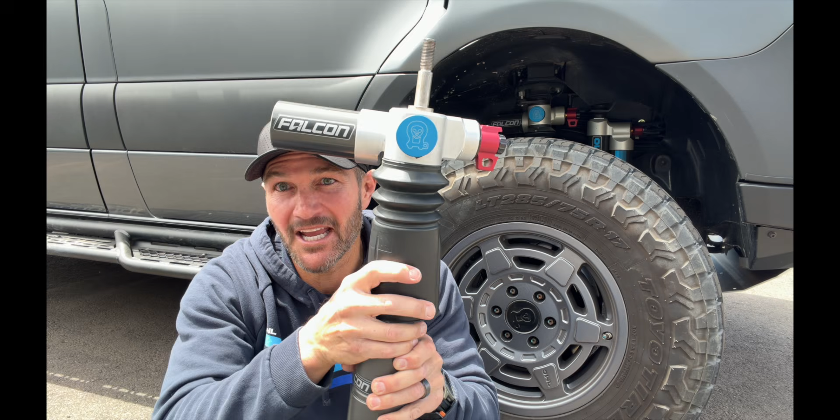This video is going to be about dampers - that's right, shocks, struts, whatever you want to call them. There's nuances to the different words, but we're all basically talking about the same thing. If you didn't see our first video, it was all about springs, specifically leaf springs and sprinters, and why it's critical to get your spring in the correct spring window. Once you do that, this is going to make a world of difference.

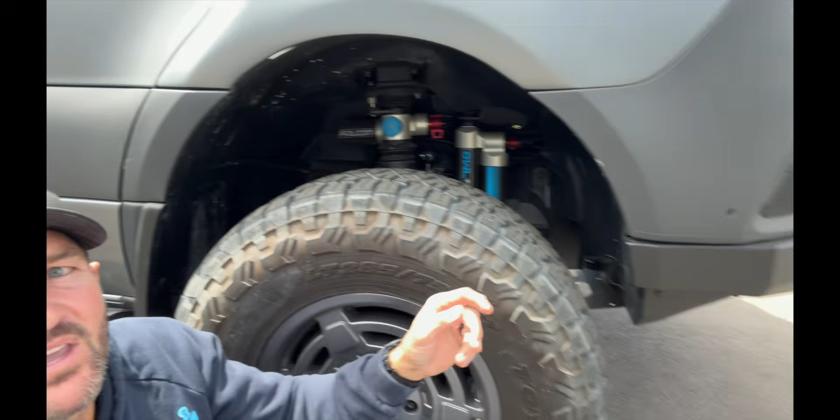Now, this is what is called our Pro Series strut. If you look behind me, before I explain what all this stuff does, you can see this is where your factory strut would go right here. And then this is what's called an auxiliary strut. These look very, very different from the factory strut, which I'm going to show you in a moment. I'm going to show you the difference in both compression and rebound.

Let's first talk about what's called sprung and unsprung weight. The wheel is unsprung weight, meaning if you hit an obstacle, the weight of that wheel has to be moved upwards by that obstacle. Whereas the vehicle itself is what's called sprung weight because it sits on top of the spring. If you don't have a shock absorber to absorb the shock, then that spring will oscillate and cause it to bounce like this. And when a tire or a wheel is not on the ground, it can't do you any good - it can't brake, it can't steer, it can't rock crawl.

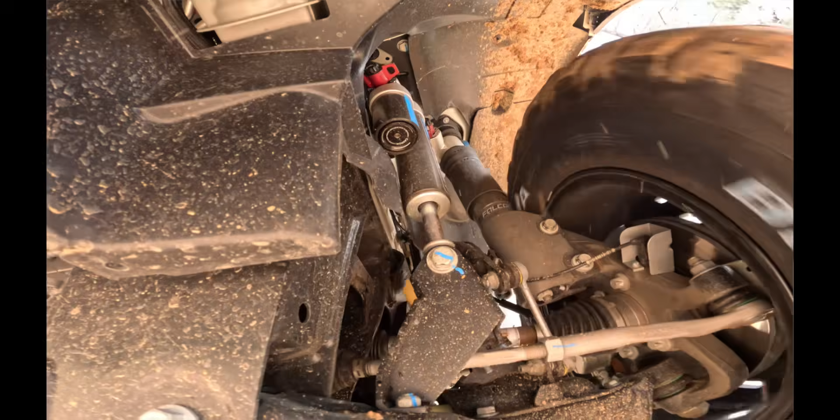And so the purpose of a shock is to actually stop the spring from springing. What is that? Makes no sense. Why would you want to stop the spring? Well, if you've ever seen one of those really old vehicles that's a complete steaming pile and the shocks are worn out, and you either push on the back and it would bounce, or it goes down the freeway with a wheel bouncing up and down, that's because the shocks are actually worn out.

Why does it make a huge difference on a sprinter? Well, we add a ton of weight, which is why we have to adjust the springs, but it's also important to adjust the shocks and the dampers. So basically, this is going to be not only more robust, carry more fluid, but it's going to be tunable.

Ours are adjustable because, as we talked about with certain other aspects of suspension, what you want off-road is oftentimes the polar opposite of what you want on-road. The same is true when it comes to these things. Let's talk about how a shock does what a shock does. So you have a compression.

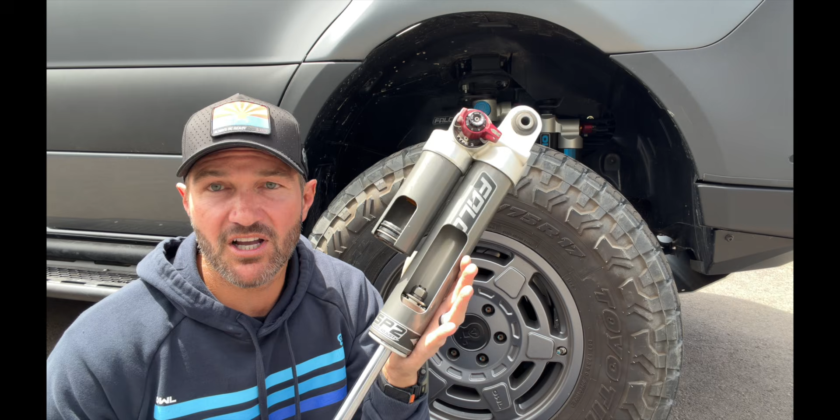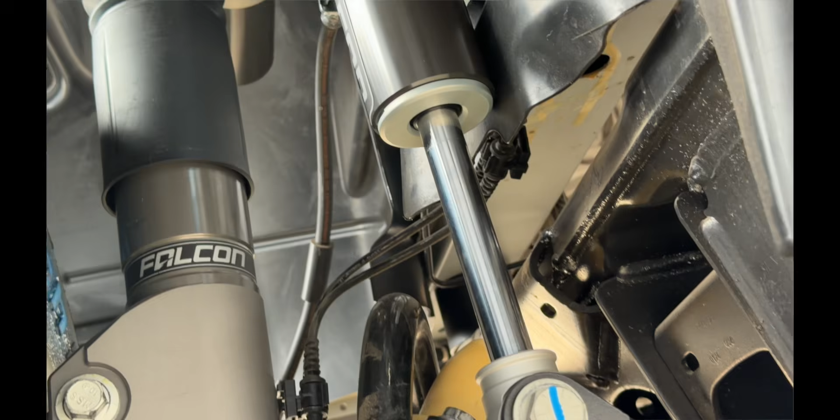Now I've got a cutaway shock here, which is nice because I can use this, and we can talk more about what this looks like internally as we get more into this video. But this is a cutaway of a piggyback reservoir auxiliary shock - so that is this one up here. This is connected to both the vehicle, the sprung weight, and the axle, the unsprung weight. In a sprinter, the rear is a solid axle, and in the front, it's not, but that's kind of irrelevant.

So as the spring allows this wheel to go up, that's called the compression. So if anyone's talked about shocks before, and you hear them talk about compression and rebound, well, this is your compression - shockingly, the shock is compressed. It's a lot of puns. And this is what's called rebound. So why they don't call it extension, I don't know, but it's called rebound.

And the reason these are important is when you hit a bump and that wheel is fired up towards the sprung weight, the vehicle, this is going to let that wheel travel up along with the spring, which is then storing the energy. A shock itself will not push the wheel and the tire back down. The spring stores the energy, and then it goes to push the wheel and tire back into contact with the pavement. The only problem is it's going to bounce it off the pavement like a bouncy ball. The purpose of the rebound is to put that wheel and tire back on the ground in a controlled way.

So theoretically, if your suspension is working properly, your spring will allow the bump to be absorbed with enough softness in the compression to allow that bump to be soaked up and not transferred into the vehicle. And then you're going to want to have the spring push that wheel and tire back down and have the rebound such that that wheel isn't fired into the ground, and it's also not too slow, because if it's too slow, this is compressed and then you hit another bump and then you have no suspension.

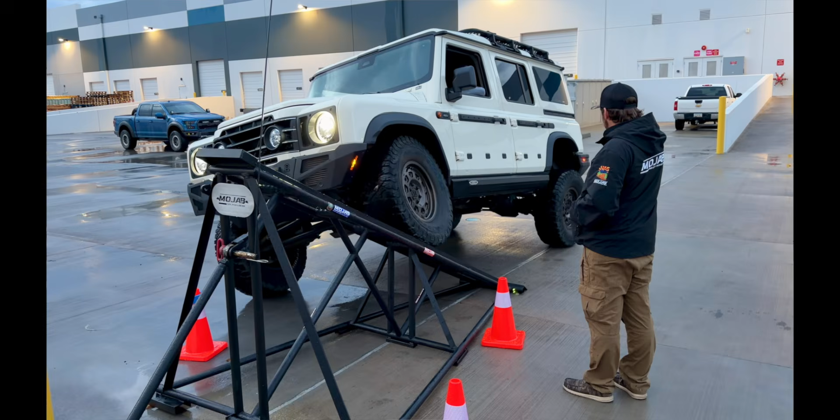So you're going to want to make your suspension soft, going from a firmer setting to a softer setting. That allows the compression to go up slower but more smoothly, and the same thing coming down. It's not going to fire that tire at the ground like it might on a freeway over a small bump.

When you're in the dirt, a harsh setup is very uncomfortable. So compliance is the word I use when you're in the dirt. You want shocks or suspension that articulate, moving up and down in a smooth, controlled motion to keep traction. Whereas on the street, you want shocks and dampers that give you good stability and feedback. That's the high level discussion of shocks and dampers.

So let's talk more about how they work. We're in the lab, I've got my cheap Amazon lab coat on, and my glasses so I look smarter. Let's talk about how shocks actually work.

One of the most important aspects to look at first is the basic layout. Let's take this auxiliary shock, like from a Sprinter 2500, and compare it to a factory damper. This one's actually off the rear, but it doesn't really matter, they're basically the same in front, just with a different bracket. The shape is what we're going to talk about here.

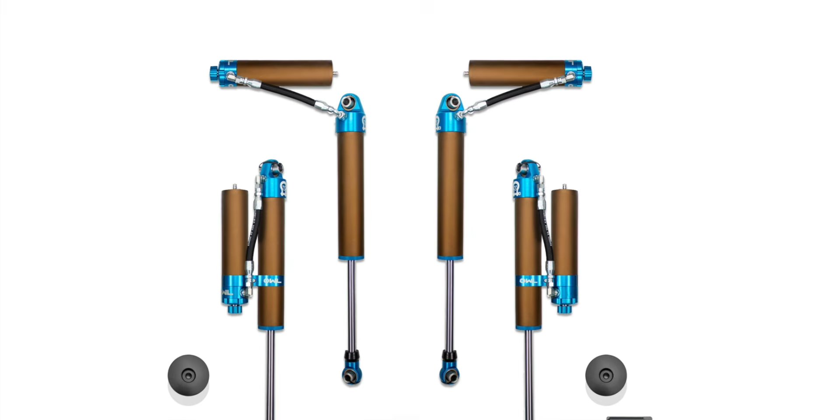This is a smooth body, and this is called a piggyback reservoir, because it's like a little piggyback. Isn't that cute? You also have remote reservoirs where this has a hose, like our trail flow kit for Grenadiers. But I want to explain why this is so much better than this.

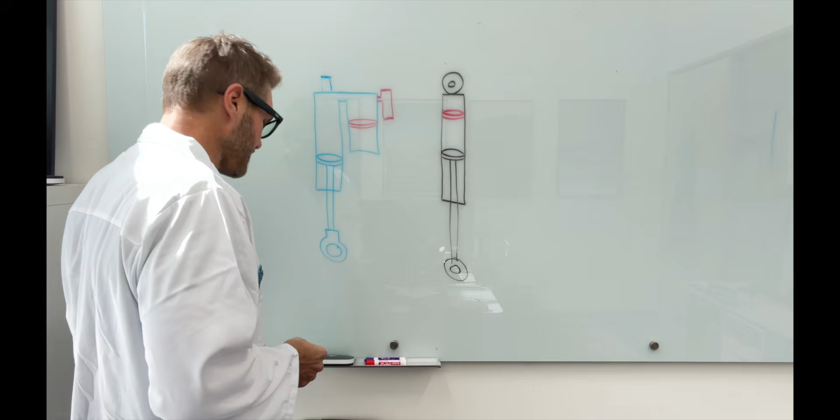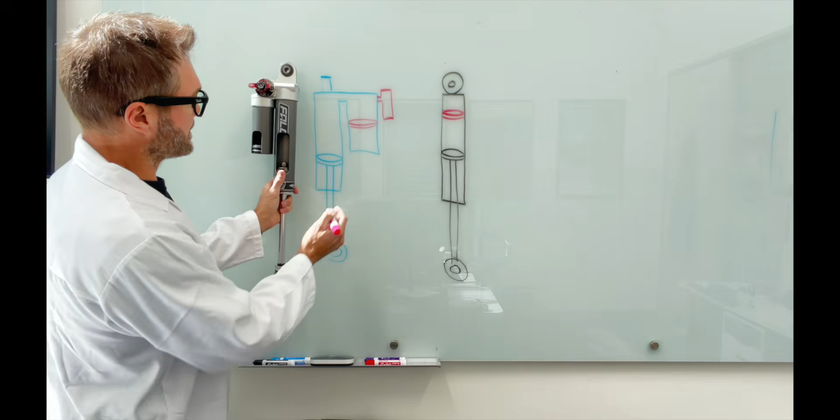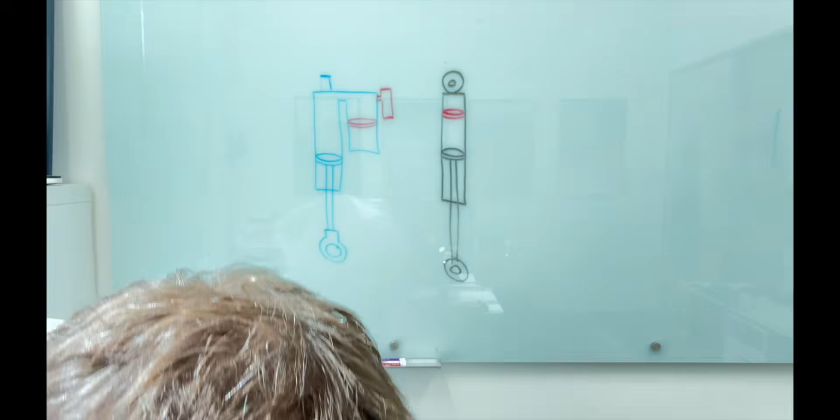Let's use pink, pink's a good color. So you've got this area here, and if I hold up a piggyback reservoir with the cutaway, it's actually opposite this, but this area corresponds to this area here. I'm going to shine a light so you can see it - see that orange piston in there? This area is called gas, that's your gas. On a smooth body shock, like found on the Mercedes Sprinter, that's going to be this area here, and that's your gas.

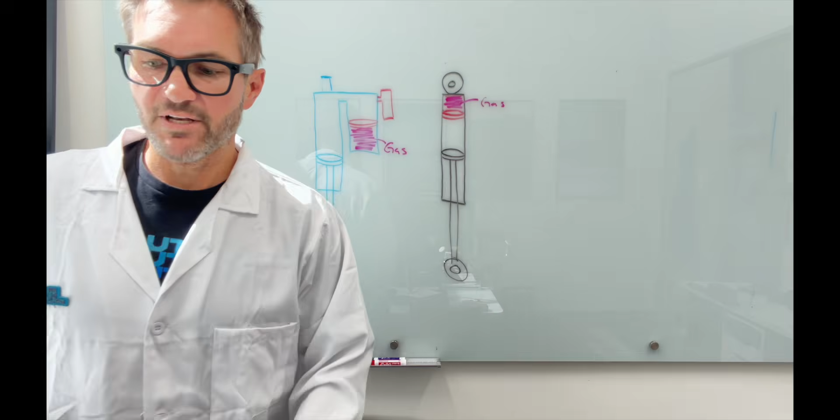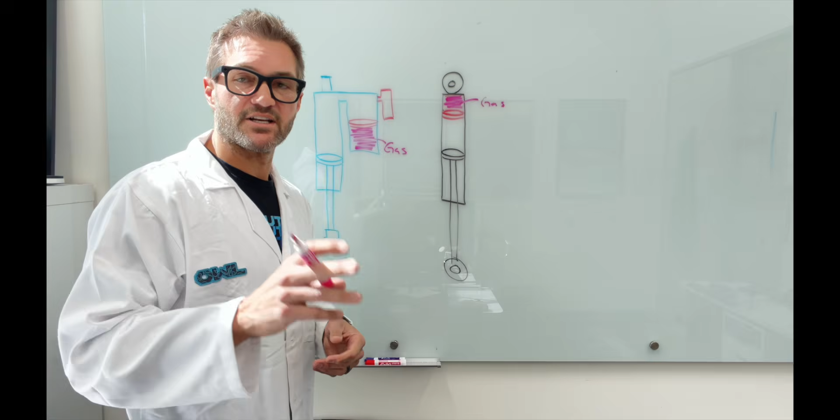There are a few different things you can fill this with gas-wise. Most good shock manufacturers use nitrogen, because air is hydrophilic and contains water, and water can corrode things. Additionally, if you have water in it, as you heat it, it can expand more because the water can turn into vapor. That's why they use nitrogen in race car tires and in airplanes as well, because it's inert - so the tires on an airplane, should you have a blowout, won't catch fire.

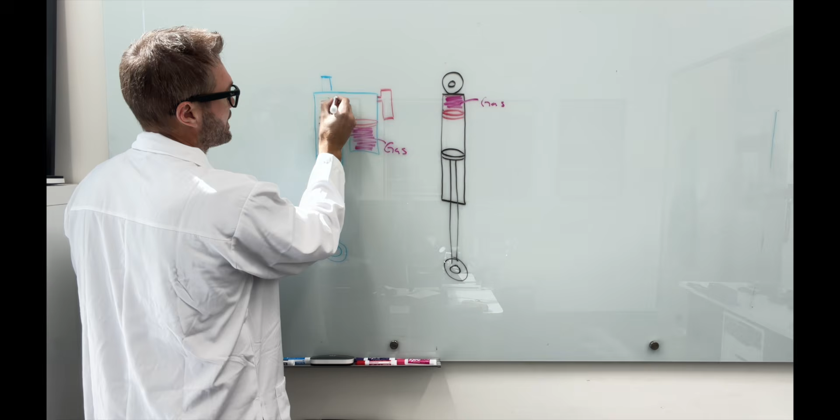Anyway, so you've got a gas portion. What that gas portion does is add that soft compliance, because the rest of this - I'm going to make the shock oil brown here - we'll color this whole area here. And we've got a tube over here, and then stuff here. Actually, I should have technically drawn some more valving here. So I didn't draw the oil over here.

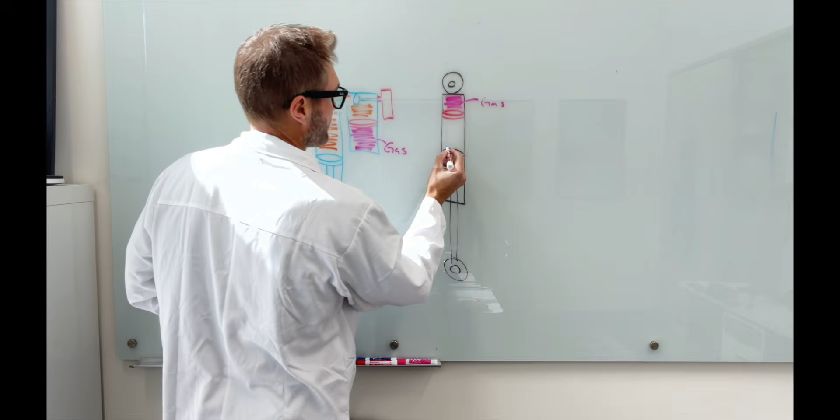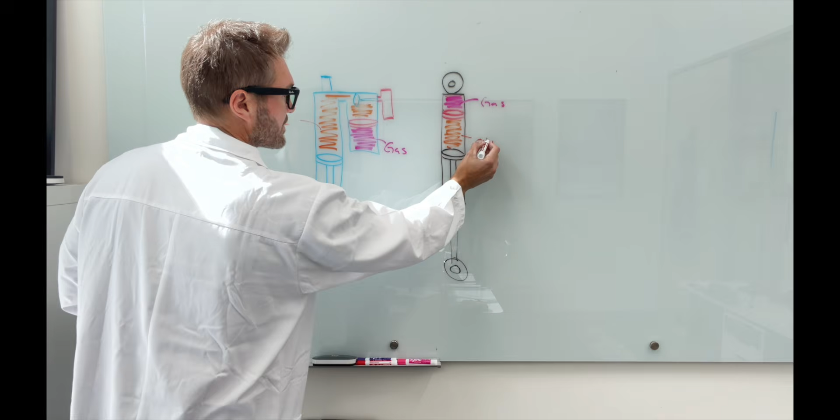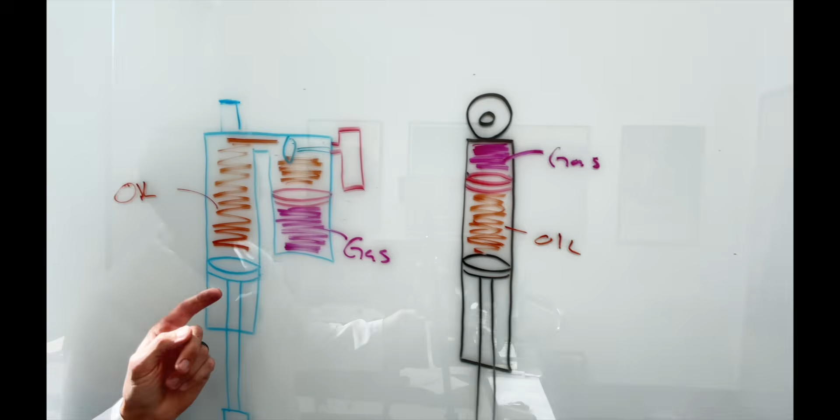So immediately what you can see is that the sheer volume of oil in a piggyback shock versus a smooth body is massive. As I bring you in closer, you can see that the amount of oil in this piggyback shock in this demo is basically double. Now what it is exactly in the real world, I don't know. However, you can clearly see that, and this is a front shock, so if I had a rear shock, this would obviously be longer. But the amount, this is just a shielding, so there's nothing in there but a piston. You're talking about this portion here. It's not only skinnier, but you only have a small section of this that can contain oil.

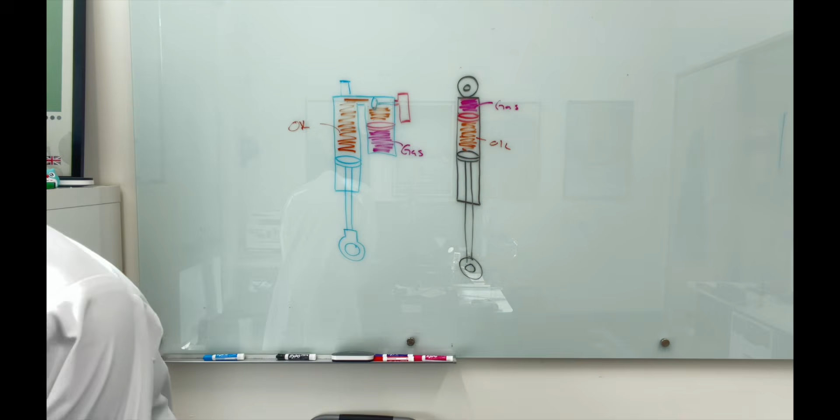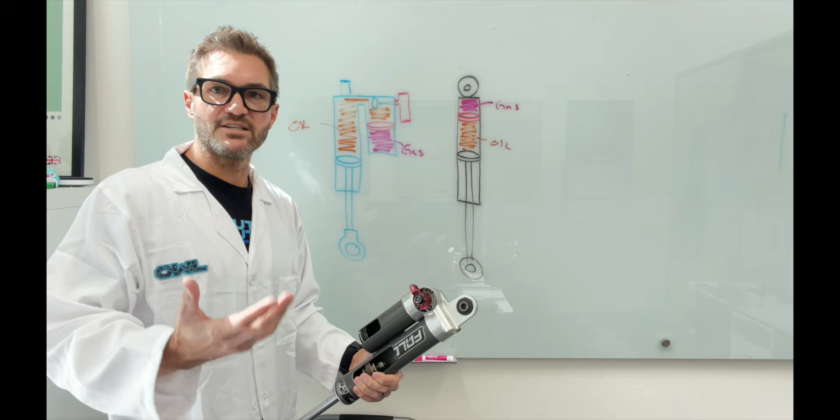Why is that important? Well, anytime you have kinetic energy going into the shock, which is that compression stroke we talked about, you're gonna have fluid traveling back and forth through the valving, which we'll talk about shortly. That's going to create heat. When you create heat, you actually get less viscous oil, which means it's thinner, and it will then move through the valving more easily, which actually changes the valving of the shock. And so if you have it valved properly, but your oil gets too hot, it's actually gonna be a much softer valving than you intended because it's gonna flow through the valves much more quickly.

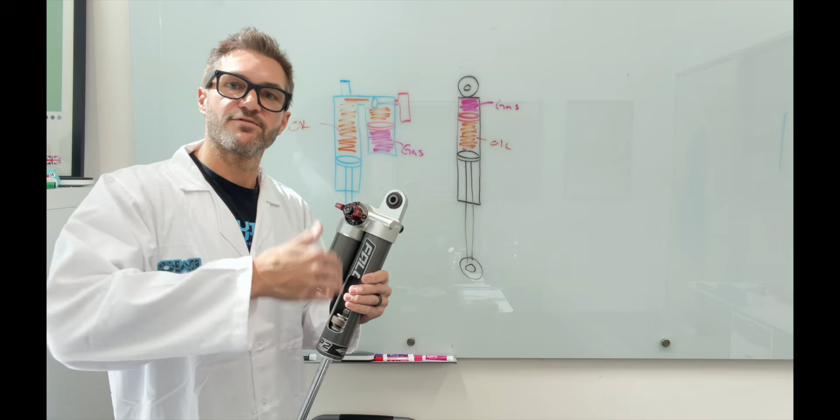So one of the advantages, just going from a smooth body to a piggyback, is purely the amount of shock oil that you have to dissipate heat. That's gonna mean that your damper is gonna work more effectively on those washboard roads where it might be going up and down really quickly, frequently, for a long period of time.

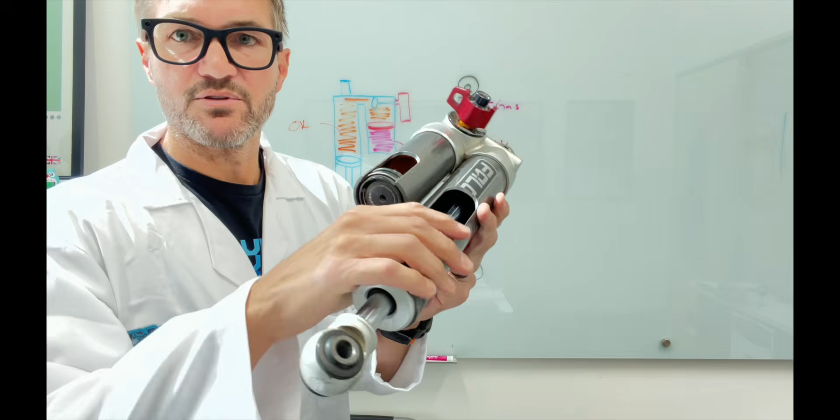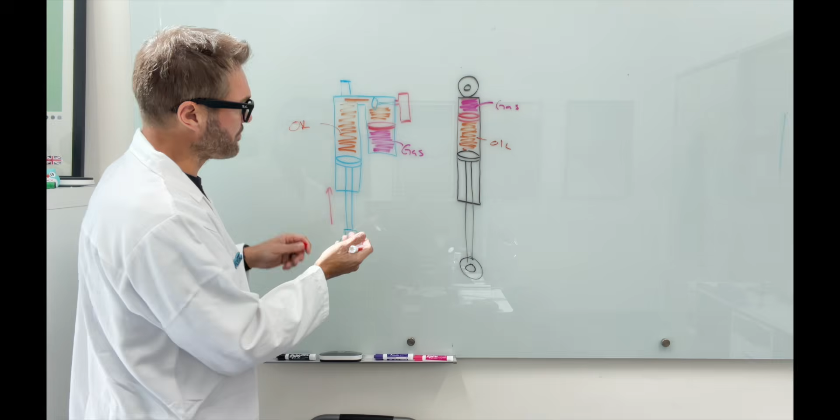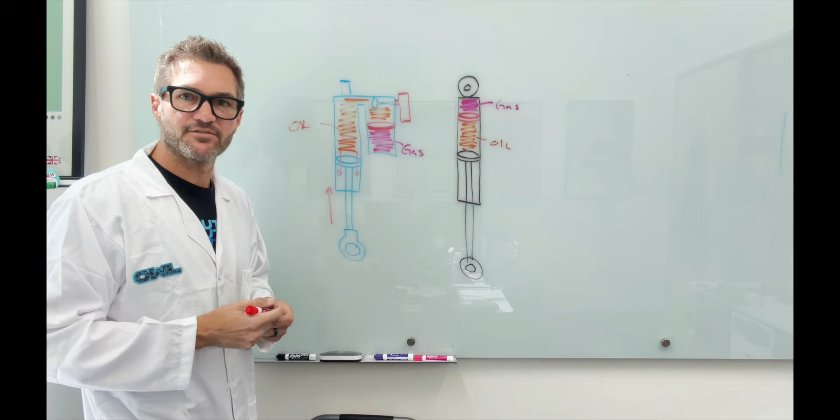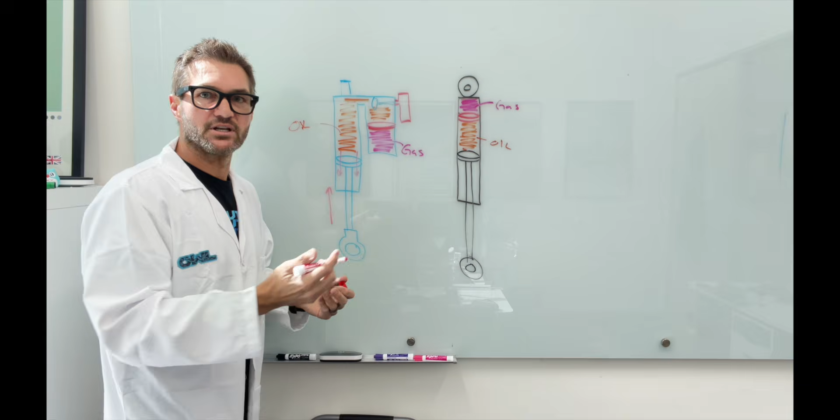Now let's talk about this gas area. What the gas area does - remember I showed you this thing in here that was orange? That moves up and down as this shock is compressed, right? So we're moving this up. That's going to allow a certain amount of oil past the valves, but liquids are not compressible. So oil, water, it's not compressible - it's one of the reasons hydraulics work. So as you move this fluid through the oil, if you try to move it really fast, the oil can't always travel through the valve fast enough if the shock is compressed very quickly. And so what happens is this gas, which is much more compressible, ends up being kind of like a compliance or a cushion.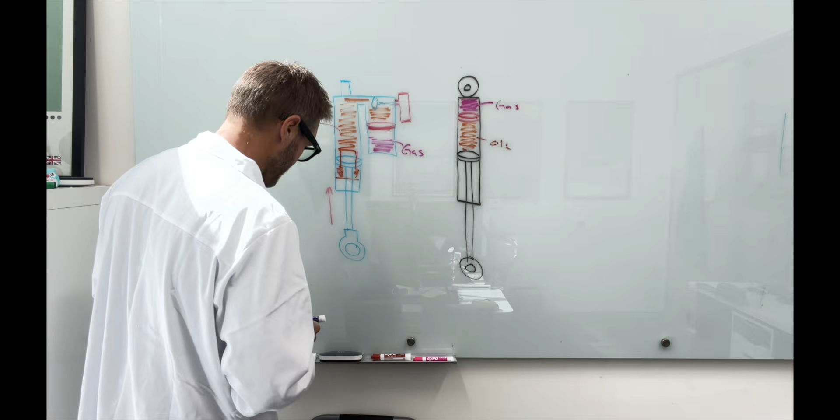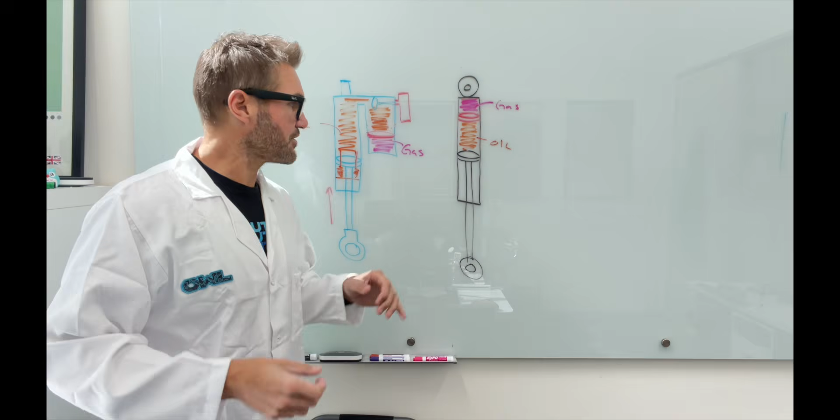So this, as this would go up, oil would go down - the oil would pass through the valves down here. And then what would happen here is this gas portion - if you want to be more technical with my Amazon lab coat on, gas thing - so this plunger might now be down here, and some of the fluid has now pushed more on that, and that is going to allow a bit of cushion because it's compressible. And so this gets dialed in the same way that your valving would get dialed in.

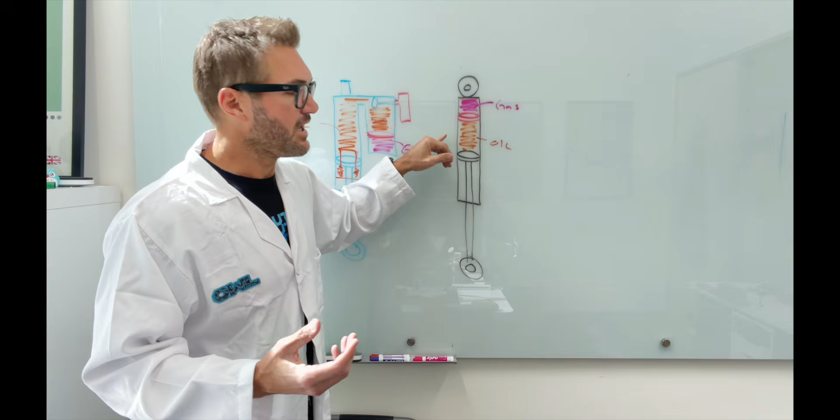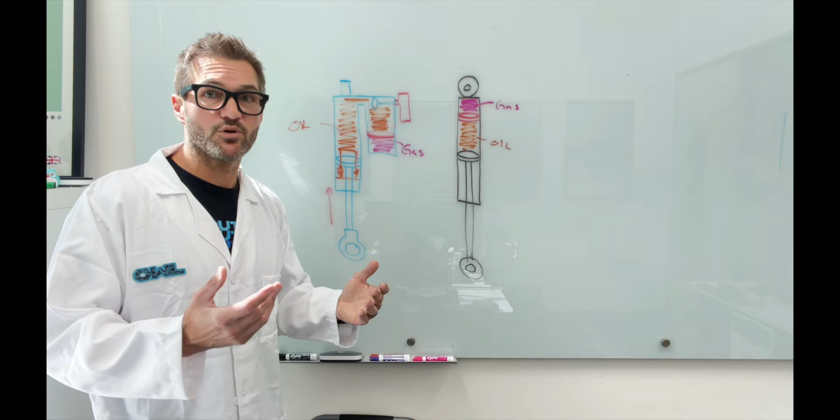And again, moving over here, you just lose room for everything. And when you have an empty cargo van, you only need so much dampening. But when you build them out into adventure vans, you have massively more load, especially on the rears. It's not firm enough, it's too soft. Just like the vans are undersprung, the dampening is underdamped. And so just changing the spring isn't gonna fix it, just changing the shock isn't gonna fix it - you really need to change them as a pair to get the back end working. But again, I go back to just the sheer volumes in a smooth body - you can't really accomplish great off-road performance or great on-road performance with all of your kind of limited capacities.

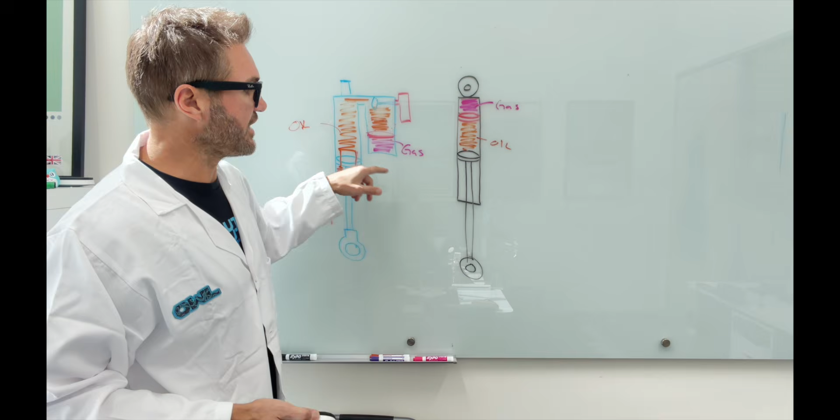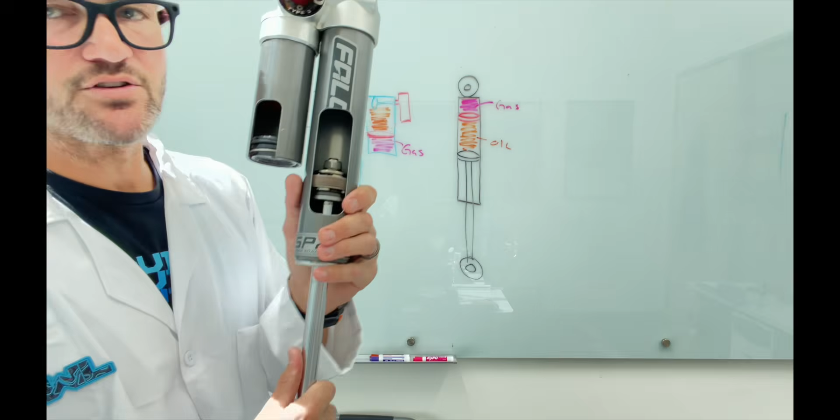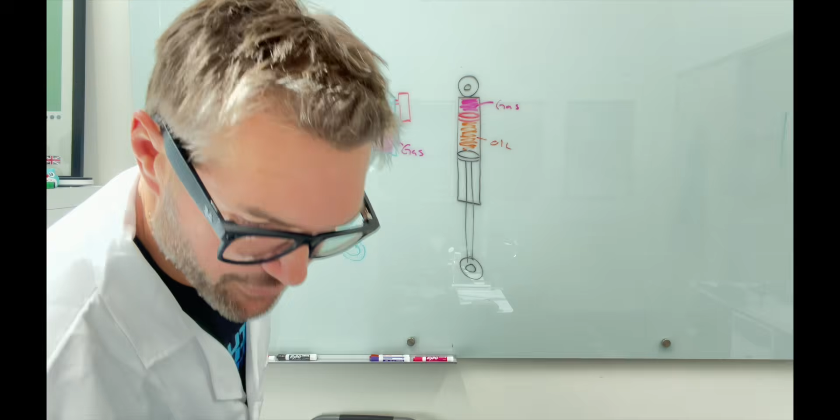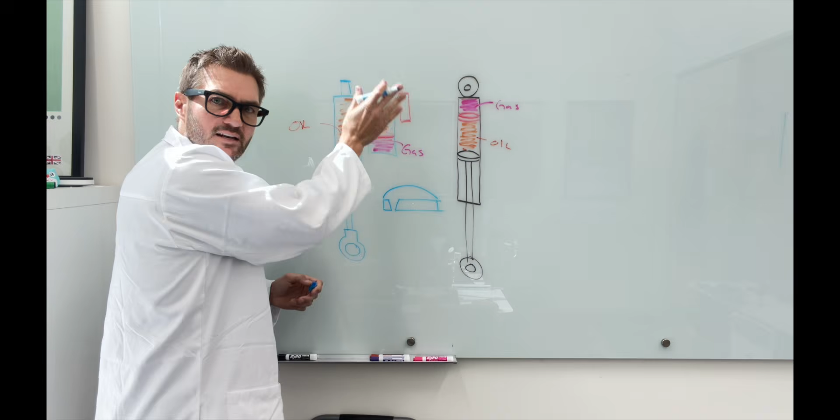And that would be for oil. We've cut it in half like pizza. And then this would be for compression, because the oil would be traveling this way. And then this would be rebound because the oil would be traveling that way. And so what they do is in that machined valve, they offset those holes.

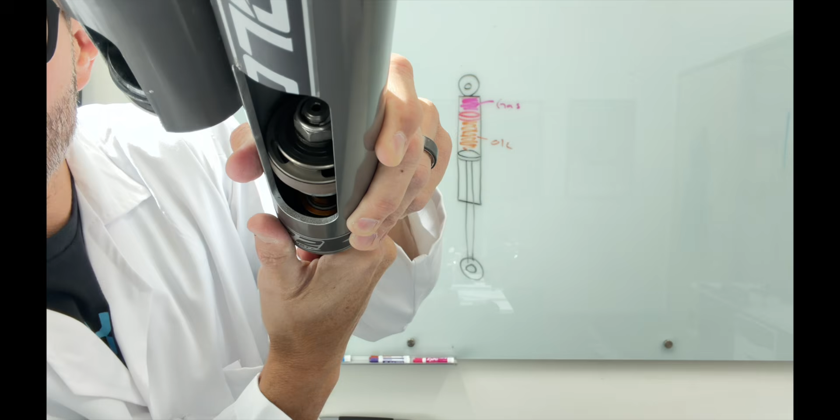So you can see two right there, and then you flip it and you see correspondingly a single on the bottom. And so that is how they feed the fluid through the valving. That's one way you can change how a shock performs.

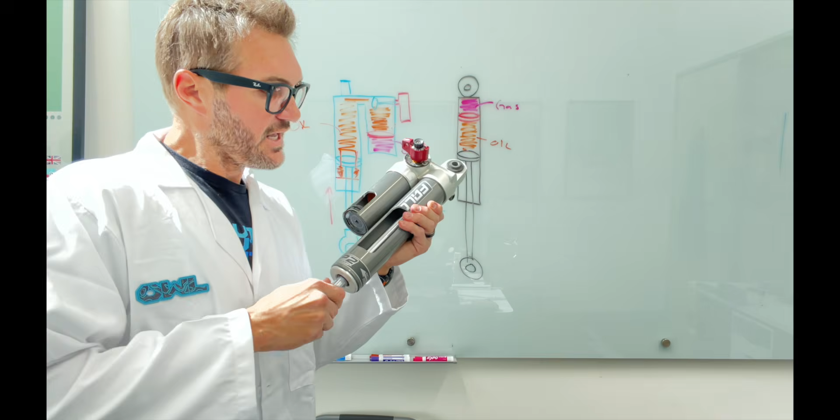You've also got these shims. Now they're really hard to see, but they're right below here. It's a little piece, see these little washer-like things? Okay, so that's your shim stack. And your shim stack is kind of going to be something that is progressive.

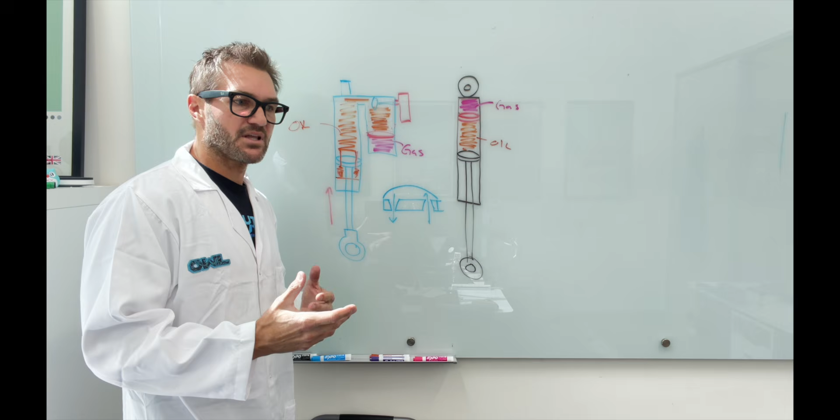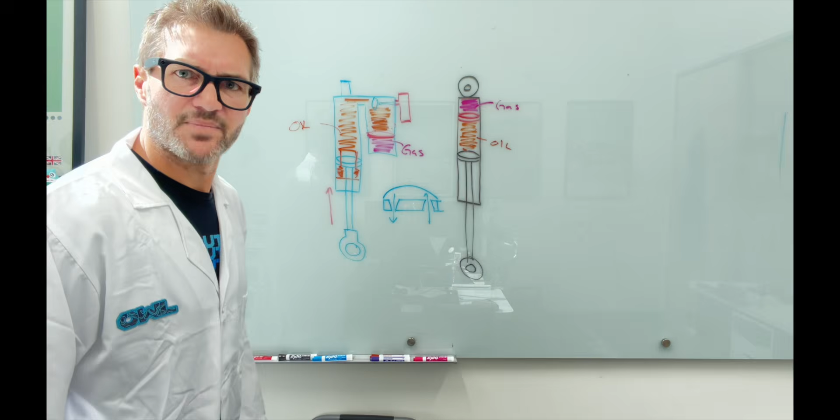What I mean is, as this goes up faster, we talked about how it compresses the gas. But what also happens - let me move over here, I might need that later. So now if we look at the shim stack, you've got a valve, way blown up, and below it you've got holes in this.

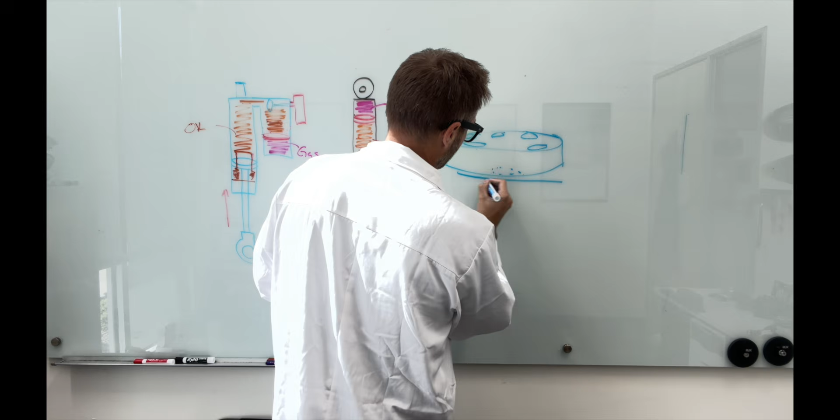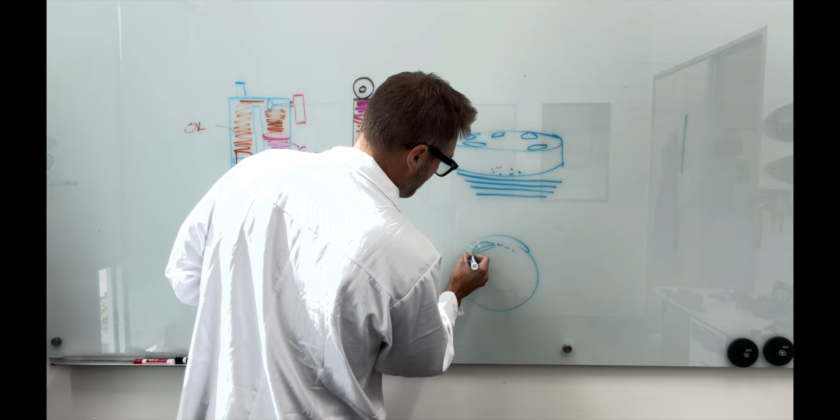Okay, so you got holes on both sides of that. Then below it, you have these stacks of shims. And oftentimes they will be like an upside down pyramid. These are blocking part of the flow through those holes. So if you looked top down at a valve, you might see a hole like that, and then the shim would be like that, so it's partially blocking that hole.

Let me bring this in close so you can see. So you see how that shim down here is partially blocking that hole and the fluid traveling through it. So this is the side view, this is the top down view.

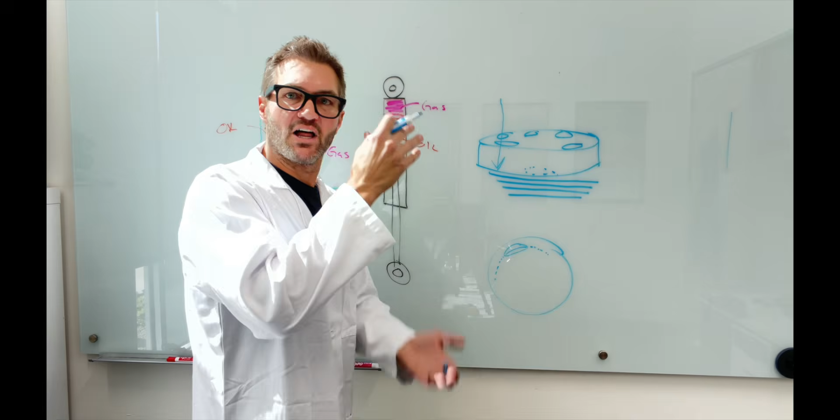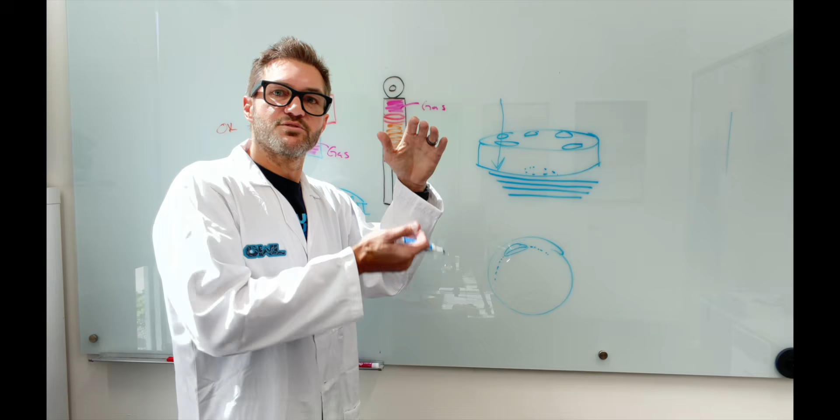So what happens is, if the fluid is traveling really, really fast, we get a really fast compression. You hit a big bump and the shock has a lot of compression very quickly. It's called high-speed compression - not high speed as in the vehicle's moving quickly, but high speed as in the shock is being pushed through its stroke at a high rate of speed.

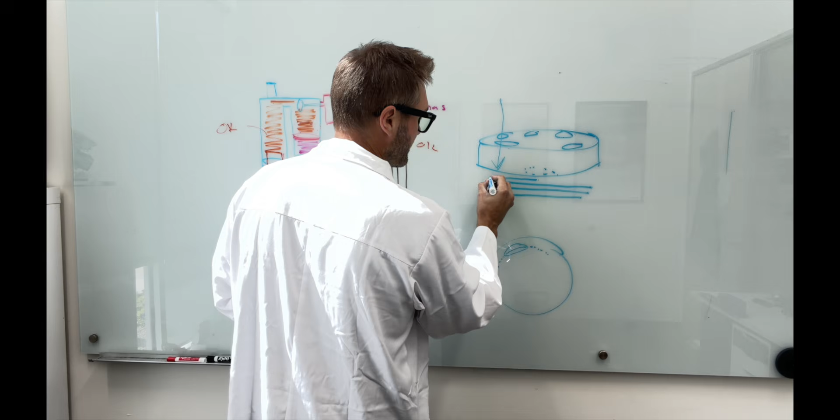So what happens is these shims differ in thickness and they differ in size. That's because, see how this is unsupported right here? What's gonna happen as the shock travels faster, the fluid is gonna push on this shim and it's gonna deflect it. So the shim is gonna bend down - I don't know if you can see that - so now we've got a droopy sad shim, and it's supported by the shim below it.

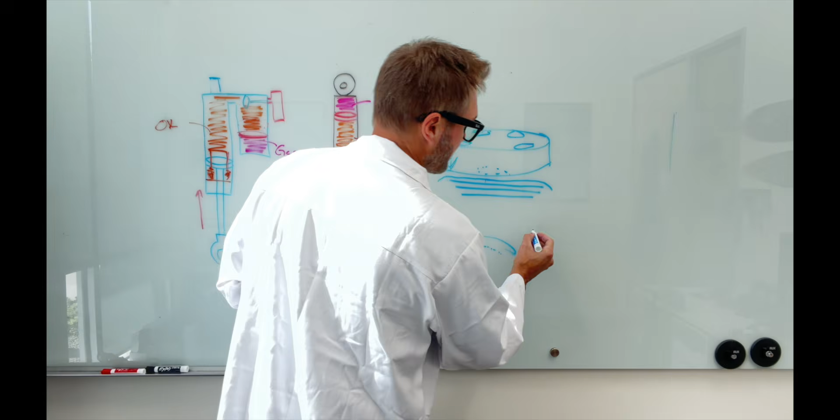And the reason they do kind of an inverse pyramid is because, again, it's progressive. Just like - what does this look like? A leaf spring. Ever seen a leaf spring? It looks like this, an upside down pyramid. That's how we get progressive.

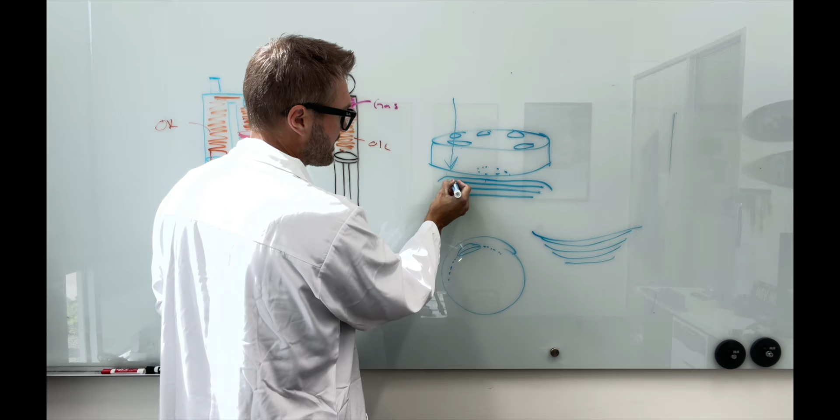So what happens is, as this fluid comes through here, it will push on this until a certain point where it will start to deflect this, and at a certain point it will start to deflect this. So what happens when you tune a shock is you can change the valving, but you can also change the shim stack. By having this one upside down pyramid, it gives it less support.

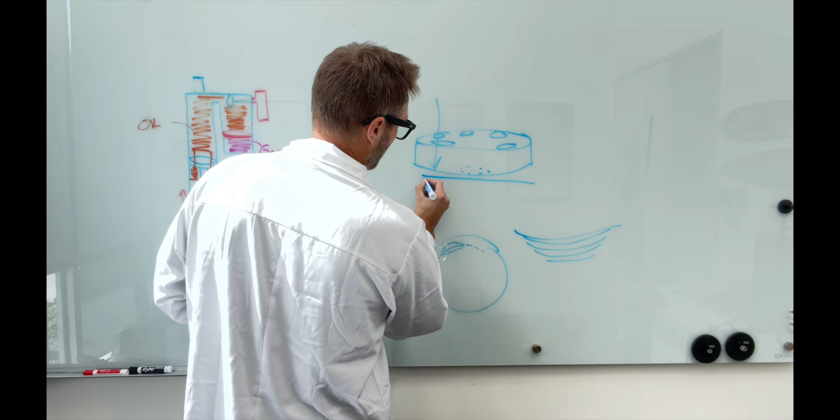On the other hand, if you went to something more uniform, so you had a shim there, and a shim there, and a shim there, that's gonna be much firmer because this shim is gonna support the one above it. It's not gonna allow for much deflection, so it's gonna take a lot of force to deflect those shims.

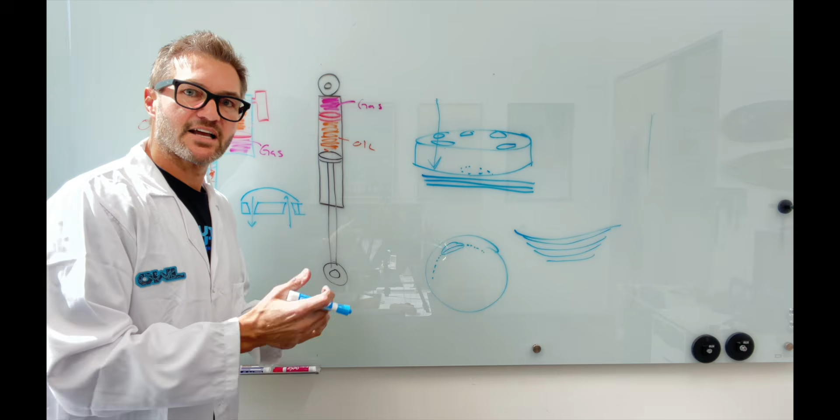You can also change the thickness of them, and all of that is going to change the way the shock performs. This is critical when we talk about our suspension being tested and tuned specifically for vans and vehicles that are built out - it's a critical component in these shocks that we change the valving and the shims. While the outside of a shock can look nearly identical across vehicles and companies, it's the internals of the shock that really matter when it comes to performance on the vehicle.

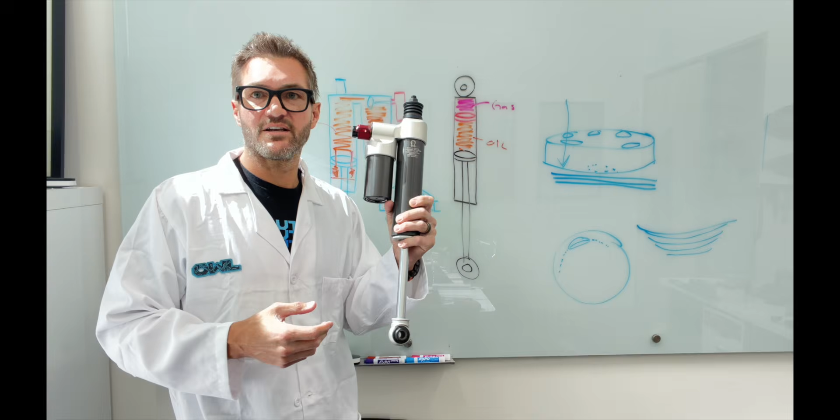Now I want to get into adjustability. So let's go out into the garage real fast and we'll show you how these shocks compare in compression and rebound force versus a stock damper.

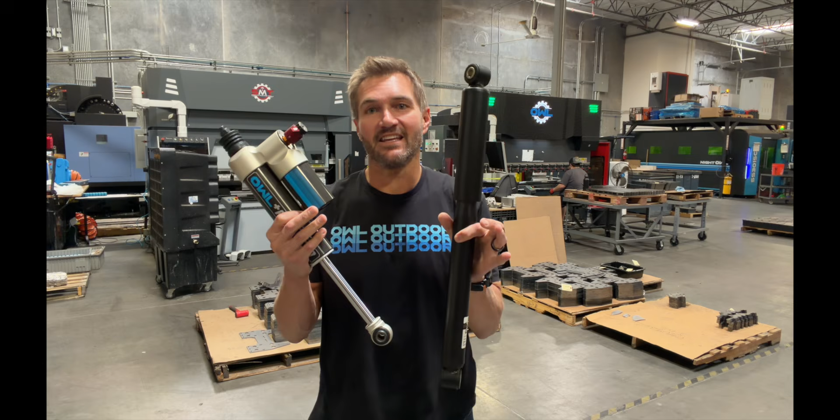Hopefully you can hear me. I came out here to the workshop because I want to demo the difference in the softness and firmness of the Owl Aero strut and the OEM strut.

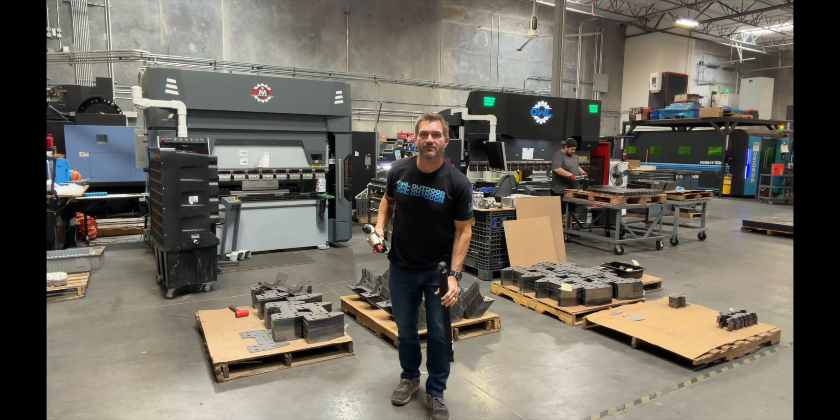This is off the rear of a Mercedes, and hopefully I can get around here. I'm gonna tilt this down - professional camera work every time, my friend. So what I'm gonna do is just demo this by pressing down, and you're gonna see the lack of dampening force on this shock.

I barely had to push on it and it's all the way flat. It's simply not enough dampening for after you build one of these vehicles out and put a lot of weight in it. Now let's compare that to the soft setting on our suspension.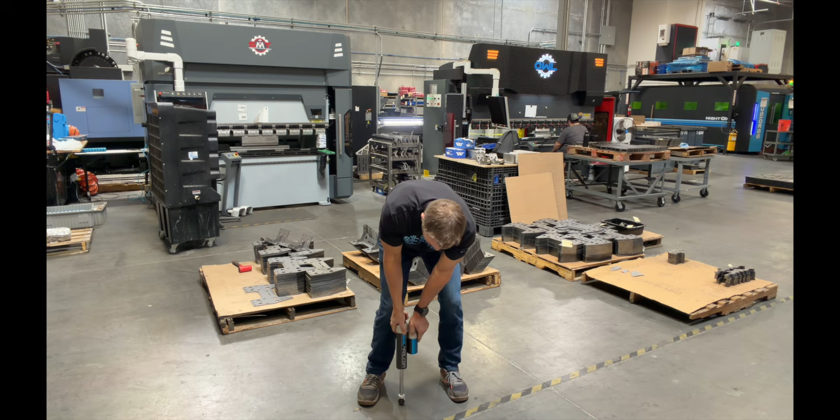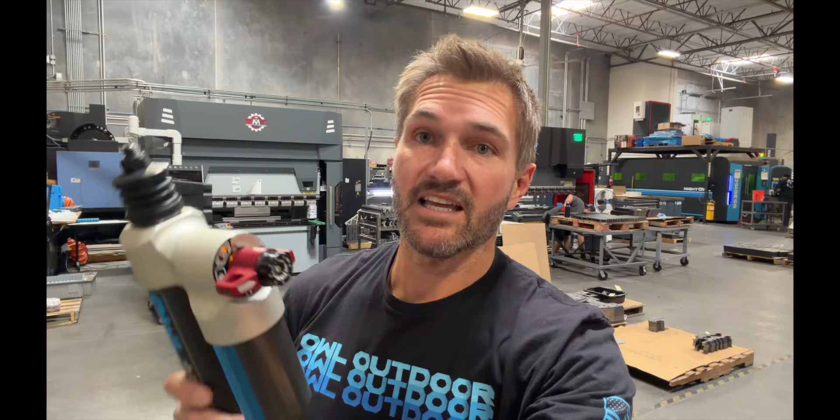So I can push it down, but it definitely requires much more force, probably about 50% more force than the factory damper. And then if we flip it over here to firm, it barely moves at all. And firm is what you're going to use when you're on road. So basically, that is why adjustability and having the correct tuned dampers for your vehicle are so important.

Now we'll throw it back to that weird looking guy in the lab coat. I don't really like him.

So now you see why it's so important to upgrade your shocks. It's just the factory stuff is not intended for the weight of these vehicles. One of the cool things is on our OWL suspension are these adjusters. And that's because what you want on the street is oftentimes polar opposite of what you want on dirt roads.

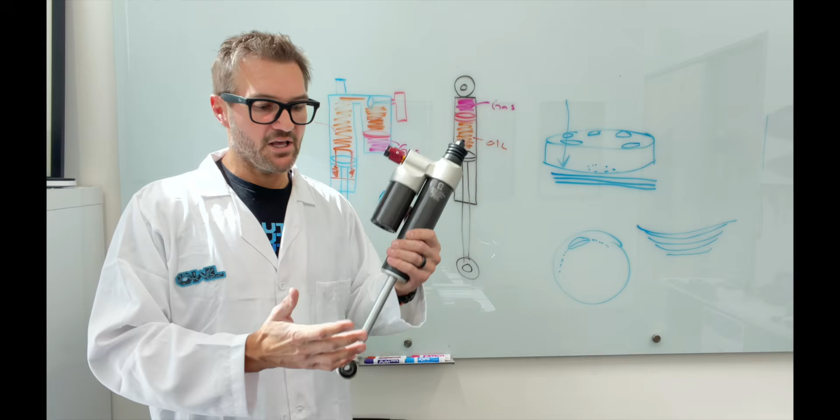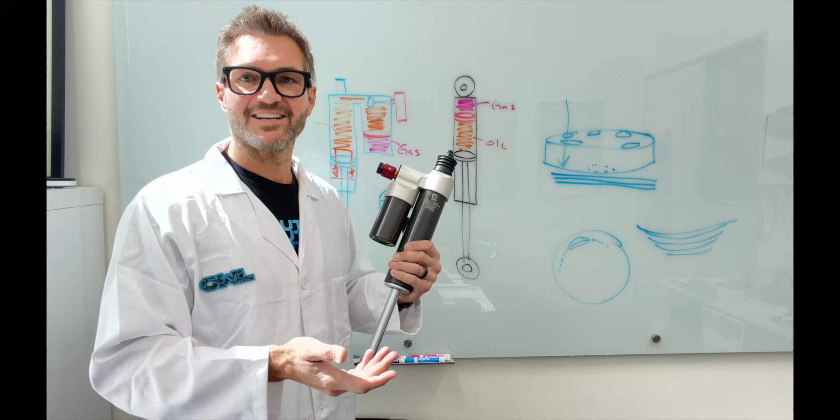On the street, you want to have something that's pretty firm. And off-road, you want something that's going to be compliant and allow those... you want something that's compliant, that goes over the different topography, dips, rocks, etc.

And you're going to want this to be valved such that it moves more softly than you would when you're on the freeway. The problem with the factory one is it's just so soft that it's basically useless once you build it out. So again, let's talk about this adjuster.

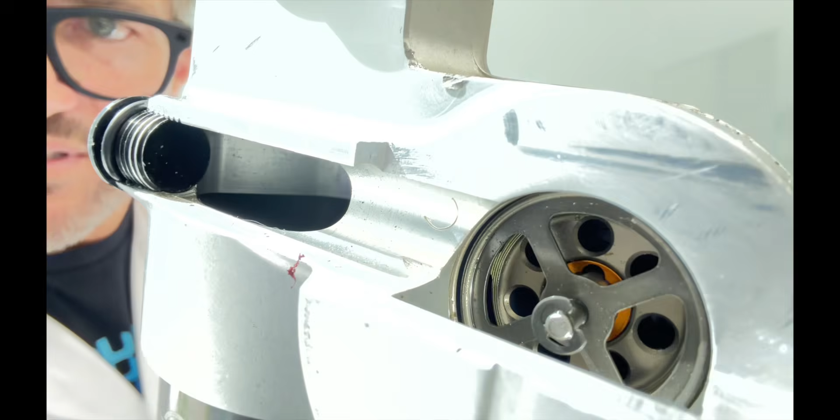So on this cutaway shock, you can see in here that as I move this knob—do you see that going in and out? So that's actually a pin that's going in and out of a channel.

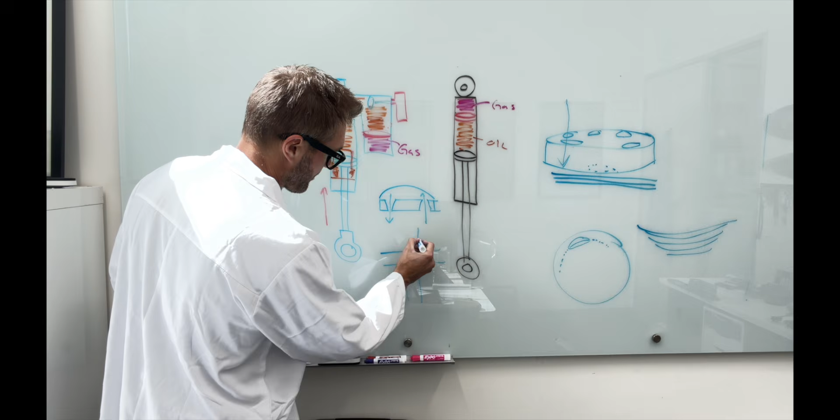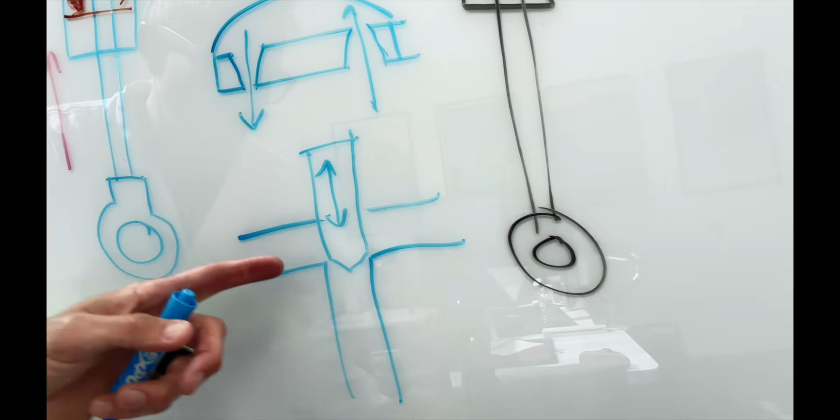So you might have a channel like this, and then you have a pin like this. And so by moving that pin in and out, if you move the pin up, you're gonna let more fluid go through that channel.

Okay, so basically there's two sets of valving on this shock. You've got the main valving that we've tuned already for you, and then you've got your adjusters here, which allow you to kind of set it up for off-road or on-road. And what those are doing is they're affecting how quickly the fluid can transfer from this section to this section.

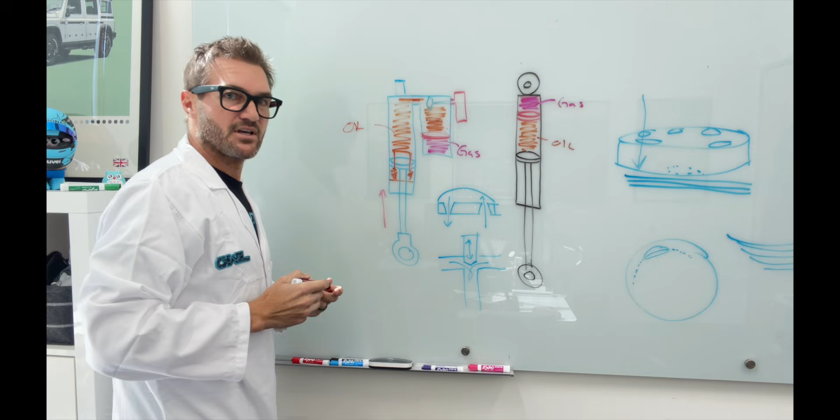So if we go back to this drawing, right? If we make it harder for fluid to travel from here into this area, you're essentially making the valving firmer because the oil can't move as quickly, which is gonna firm up the shock for the road. And then as you adjust this to soft and that needle retracts, it's gonna allow more fluid to travel through here more freely. And that is going to make the shock softer on your compression and rebound, etc.

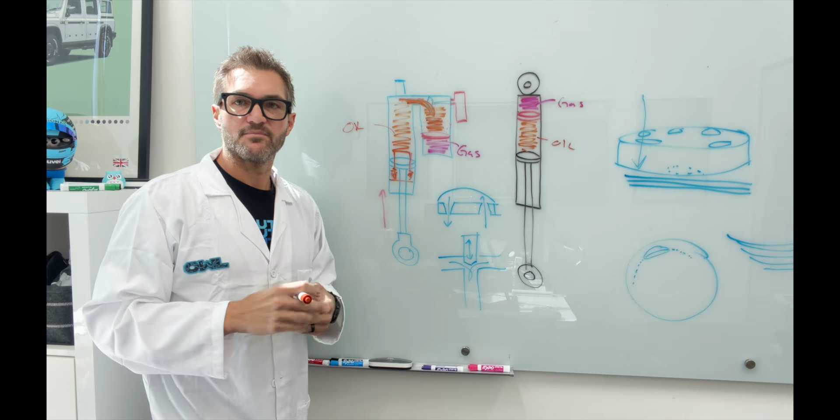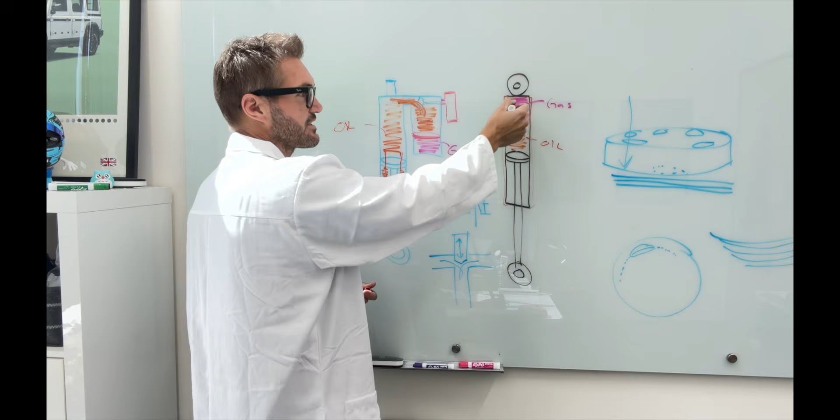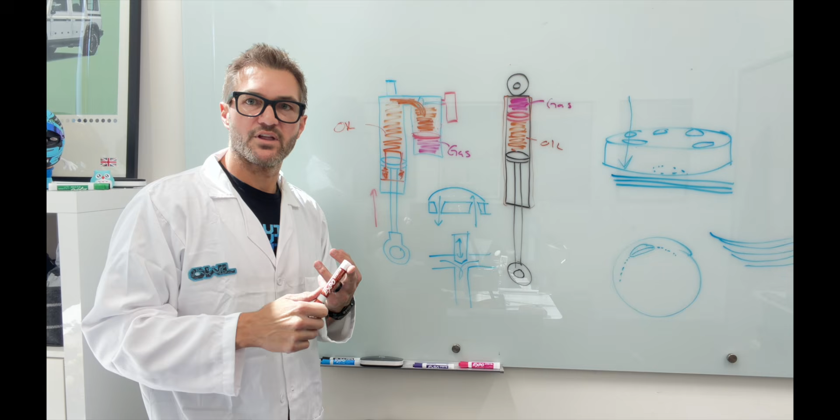But the main thing that is important to what we do is the shock tuned for the vehicle. Is it adjustable so that it works well on road and off? And thirdly, now you understand how suspension works.

So it can be pretty scary to look at and take one of these apart, but now that you know what everything does, you know that that's a main valve and you've got the shim stacks there and some washers, and you've got a piston that goes up and down there, and this adjustment is just moving this needle in and out. Once you have all that information, this really isn't that complicated anymore.

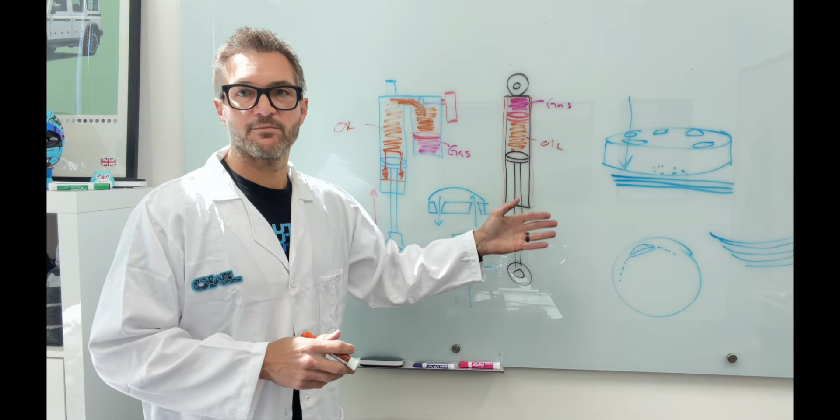And so now you're empowered, whether you choose to go with Owl OWL suspension or with another suspension out there, it's going to make your van massively better. But I wanted to make sure that you are armed with the information of how suspension works so that you can choose between the different options that are out there today.